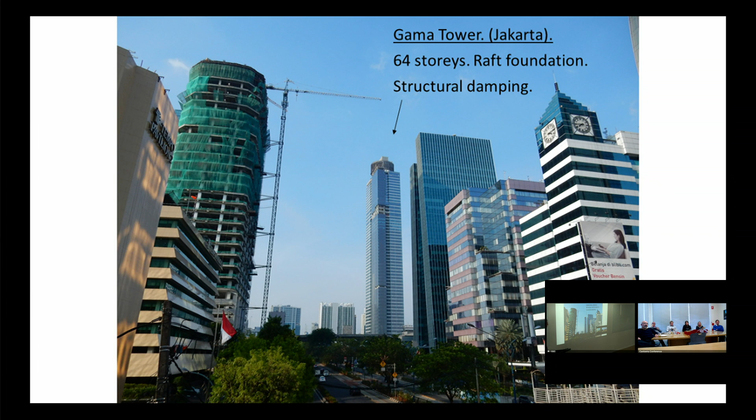Sometimes 40 metres deep, sometimes more than that. This building's on just a raft. There's a view from level 60. That is the top of the Alimak frame. So to get up to this level, we had to get out at a lower level and then walk up a scaffold on the outside of the building.

I'm afraid of heights, so I don't particularly look for opportunities to do that.

The apartment towers here, David and I have both lived in those at different times in the past. And back in the 90s, they were among the taller buildings in Jakarta. That's the war cemetery, Dutch war cemetery, which is also where they have the Anzac Day dawn service every year.

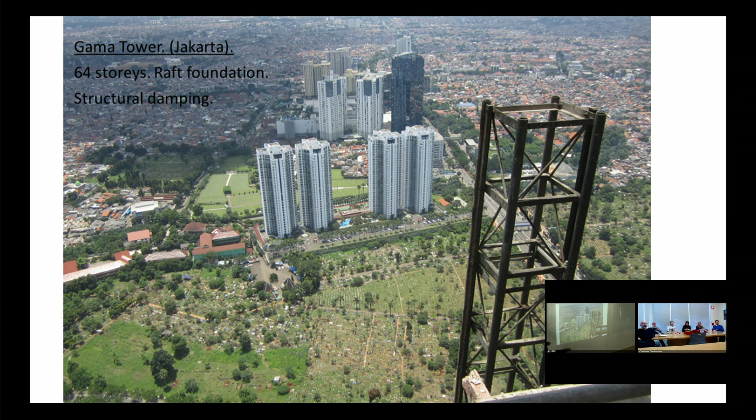There's another view from level 60. That's actually Tony Raphael talking to Mare as Tony does some dynamic measurements on the natural frequency of the building.

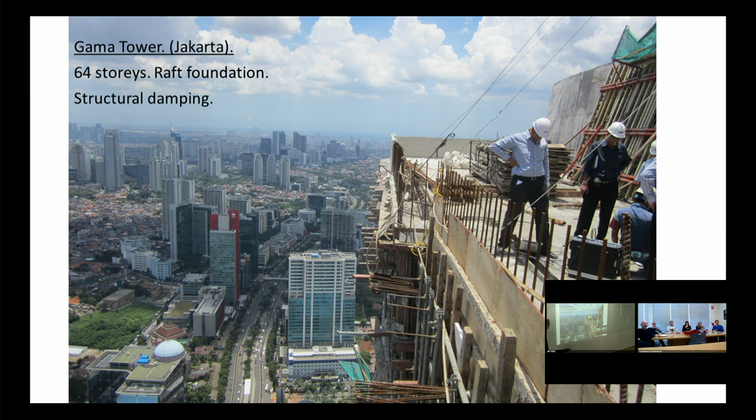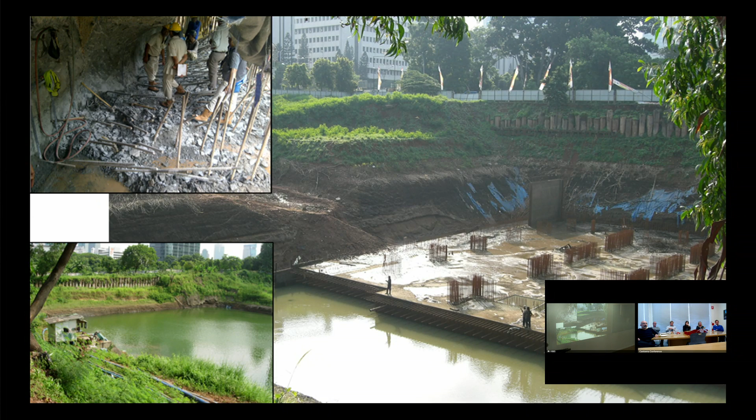Obviously, as the water's doing this at each end, you've got a large volume of air that needs to move back and forth as well. So we had to come up with a duct, and it's basically filling the space in the floor that it's in, with beams coming down and other things that were all in the way. We didn't know the final dimensions of this until well after the structure was built.

And so we've had to come up with a duct there that can not only allow the air volume to move, we're talking about 30 cubic metres of air or so having to move 20 metres every 3.5 seconds or so. And so it not only needs to be able to do it, it needs to be able to do it without excessive resistance that it affects the period of the damper itself. So getting the mechanical electrical engineers to provide that advice was a new way of looking at that problem for them.

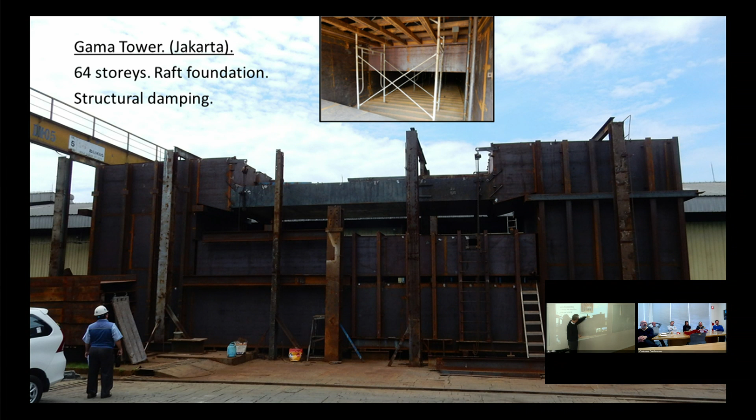Now the structure here, all of their factories prior to this were basically, they like having vacant space for services and processes underneath. And generally they tend to do beams and precast, but they complained about vibrations and other things. What we did was we just drove the piles and left them sticking out a distance out of the ground, did a flat slab over the top of that.

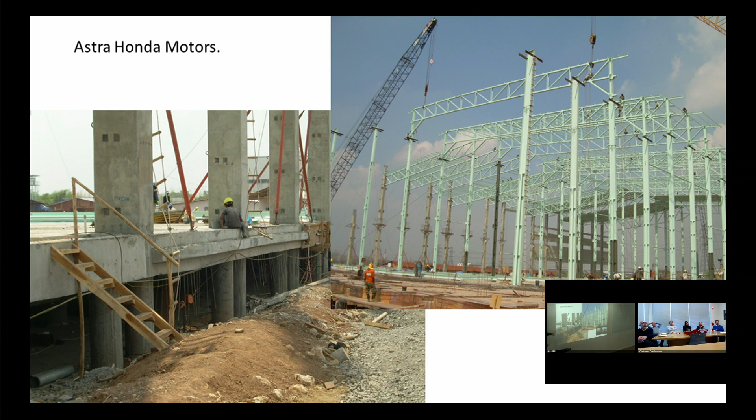Due to contractors' preference, it ended up being some precast columns, but generally it's a steel truss type structure. You can see precast cladding panels there. But Honda's quite happy with this facility. We haven't done another job for them ourselves, but apparently the flat slab's now their normal type of structure.

Arcadia Office Park is an office park development that we did when David was still in Jakarta in the 90s. Basically, it was 5 mid-rise office buildings in an open green space with several parking levels down underneath.

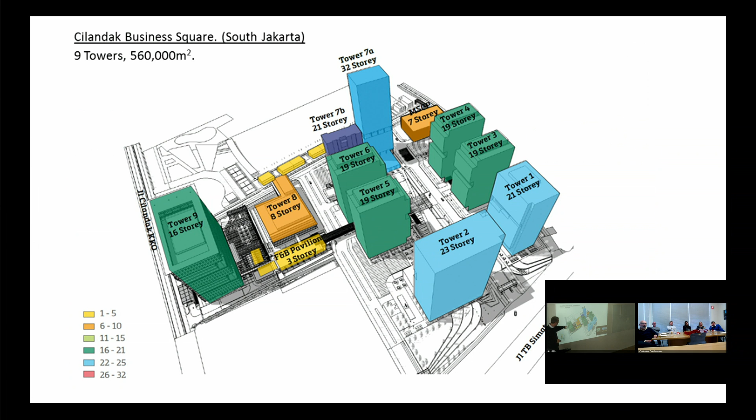The thinking at present is that we'll try to do the shell of that without separation joints for a variety of reasons, although we may have separation joints in the suspended levels above that. So just to give you an idea, this is the one we've just done, 16 stories, a 4,000 square metre floor plate, which is a pretty big floor plate for an office building, and a variety of other heights of buildings there. There's a picture of Tower 9 a couple of months ago.

Aeon Mall. Aeon's a large Japanese retailer. This one's 170,000 square metres in East Jakarta. It's a Japanese contractor doing it. They sprung a surprise on us in that they decided to use precast beams for the framing. Now normally that might not seem like such a big deal, but in seismic design you've got to design your frames to absorb energy in certain ways in a large earthquake, a bigger earthquake than what you've designed for, and precast is a legitimate structure type for that, but it presents new challenges, so we had a bit of a scramble to get on top of that one.

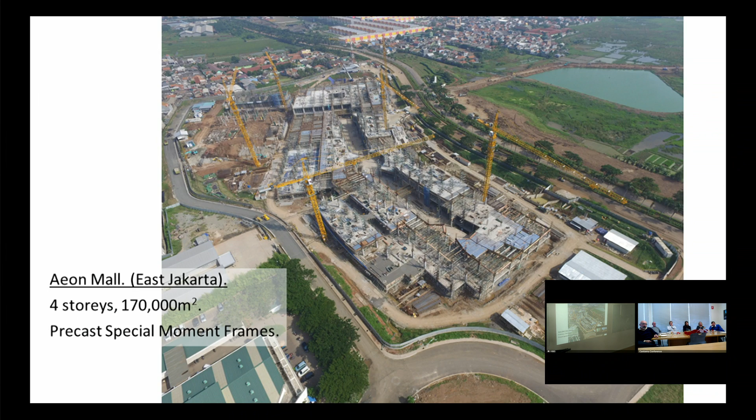IKEA. This is the first IKEA in Indonesia. Around 20,000 square metres over a number of stories. The system, possibly one of the more technically challenging jobs I've ever done, this one. Canberra gave us a bit of assistance with the design at one stage. Rifki could talk you through it. He did a lot of the sequencing and whatnot after that. Obviously IKEA wants exposed high quality concrete floors. Ideally you would do that under the cover of a roof and with a lot of your cladding up, so that you're not exposing it to the sun, the rain and the wind.

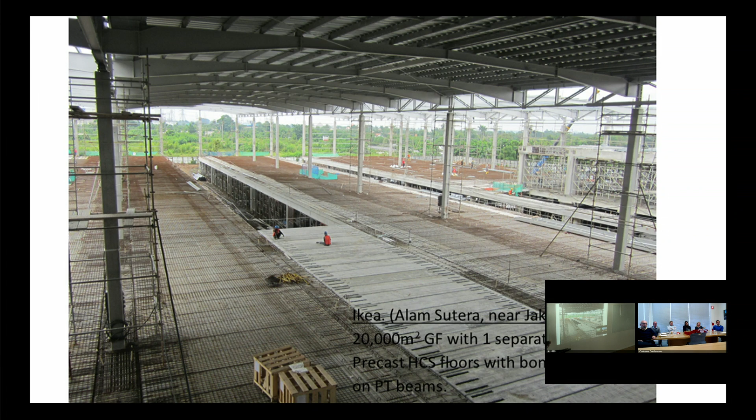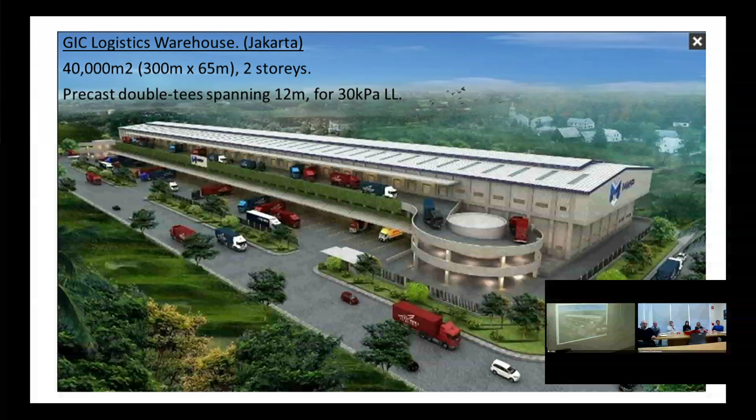Now in order to achieve that here, what we had to do was get the columns up, get the beams in, columns up multiple stories. This is about 20-25 metres high with post-tension beams running 16-metre spans in one direction. It needs to be stable with all the cladding on and with some random arrangement of precast hollow core slabs on there as well. And then at the end of all that, you want to be able to cast your bonded toppings with a good level of crack control. But it was all achieved. We're now doing a similar project for a large warehouse, 2 stories, 300 metres by 65 metres, and this one will probably be using precast double Ts.

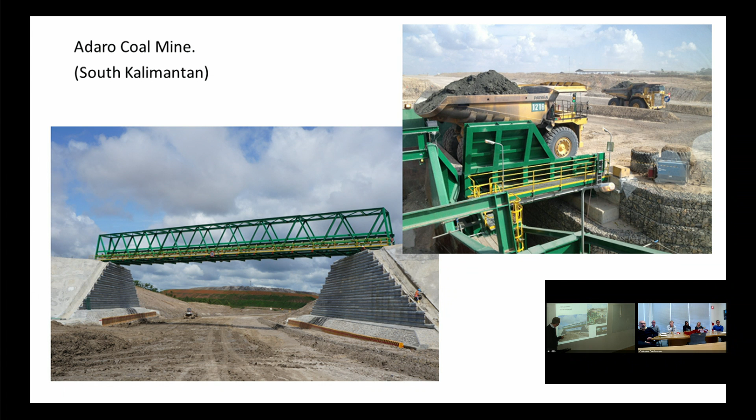We've also done work for some of the mines in Indonesia. This is a 54-metre spanning conveyor gantry over a haul road. Not long after it was open, they actually, if you can believe it, had an accident where a truck was driving along with its tray up and it actually hit the bridge. It did some local damage, but everything's still there. This is all reinforced earth retaining structures. This is a crusher where the trucks come in, they back up and bump into that curb and dump their material in the crusher. And so we did the foundations for this and the pavements around there and the suspended pavement there.

Many of you have probably been to Bali. We've done a few jobs up around Ubud. Nothing actually built yet, although Misa was a villa resort on a canyon of a river there, which got close and may yet still be built.

Yeah, but most of our work's been around the south area of Bali, particularly on the limestone bukit. And the last job I'll show you is Semara Uluwatu, up on top of the cliff there overlooking the Indian Ocean. They like to do a lot of earthworks on these sorts of villa projects, quite high retaining walls, all sculpted landscape. And the way we commonly do retaining walls for these is just mortared stone. So they're designed as a mass retaining wall rather than reinforced concrete, which is more expensive.

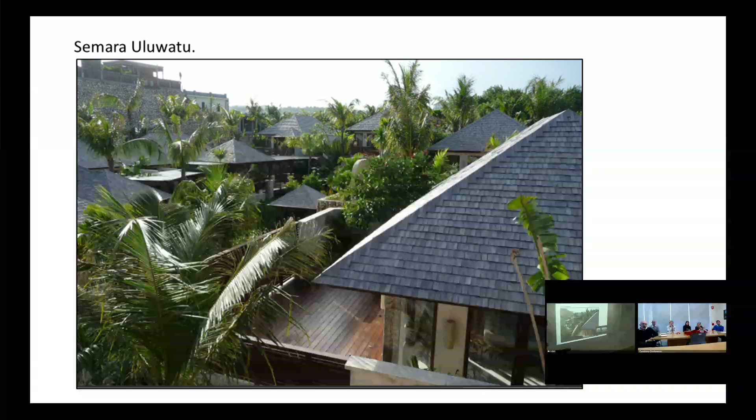But the thing I'll show you last is these timber roofs. So you can see timber shingles nailed onto plywood. Now the architect wanted to have this light space between the roof and the top of the wall, and no horizontal structure spanning across. So you've got this problem with this roof that wants to spread, and not much there to stop it. And what we came up with was a reinforced concrete ring beam, just the thickness of the wall, running around. These roofs are like, I think the largest was 7 by 9 metres or something.

So a reinforced concrete ring beam, which essentially works in tension, a reinforced concrete stub on each corner, and using the plywood, we've nailed it to the rafters and the timbers at the bottom and top there, and created a diaphragm that just spans around the corners. That's it.

Yes. Sounds busy. Are you more profitable than the Sydney guys? Depends how you measure that. Yeah. No, Sydney's the biggest and most important part of the company, I think. But we like to think that we're getting there.